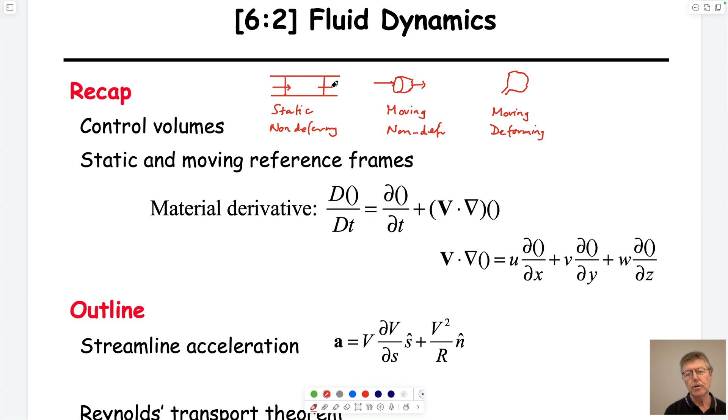So the idea is that they fall into these three categories, and I guess we'll talk about that at the end of today. We'll talk about Reynolds Transport Theorem, which allows us to accommodate those things.

But it's no different when we're talking about conservation of mass than filling up a bucket with water. You know the volume of the bucket, you know the rate at which you're putting water in, you divide the volume of the bucket by the rate, and you get the time it takes to fill it up. That's really what we're talking about, is conservation of mass.

We talked last time about frames of reference, which of course is implicit in this, right? If it's moving, the frame of reference is changing.

So if there's an accelerometer attached to me, it would read how my velocity was changing with time. But if we want to get it for this particular point, we can also get it by merely getting the velocity and the rate of change of the velocity at that point.

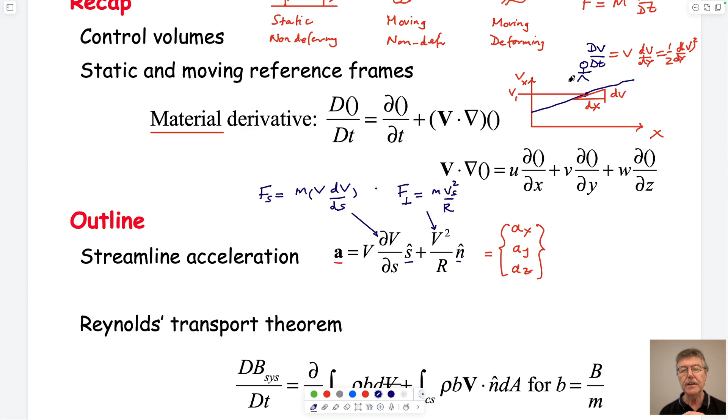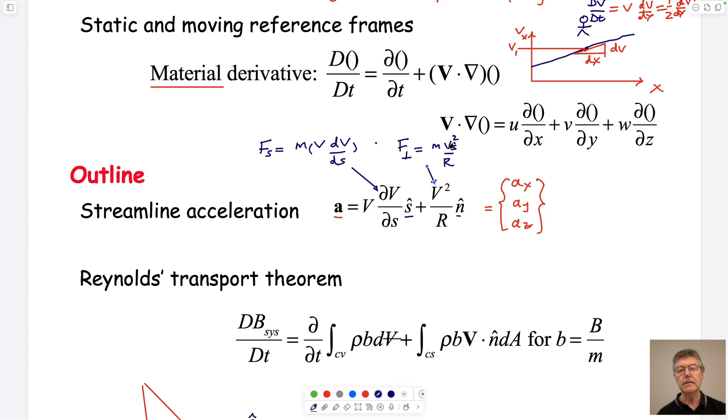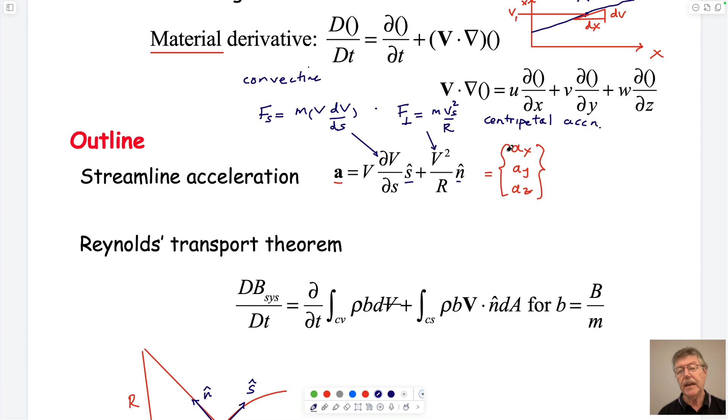We've called this the convective acceleration, which defines that moving something laterally, its acceleration is defined in space. So the convective acceleration is just a substitute for the acceleration of the body. Likewise, the acceleration of the body going around a circle—if you're swinging something around your head—is given by the radius of the string, the mass on the end, and the speed it's going around in that arc, in meters per second squared. So this is the centripetal acceleration, and this is convective. This is just saying we can calculate the accelerations in these directions.

We've used this idea before—we've talked about the acceleration in the x direction and the y direction when we dealt with statics. So what we could do is take this point here and look at defining exactly what this magnitude is. So this is our S vector, and we just need to know what the components of that vector are. For instance, we want to know what this is.

In this particular case, S is going to be equal to 3 components: a component in x, a component in y, and a component in z. So if we make this unit 1, then this by definition is square root 2, just by Pythagoras. We want this vector to be a unit vector, so unit length. So if we divide this through by square root 2, and everything else by square root 2, then we have each of these components.

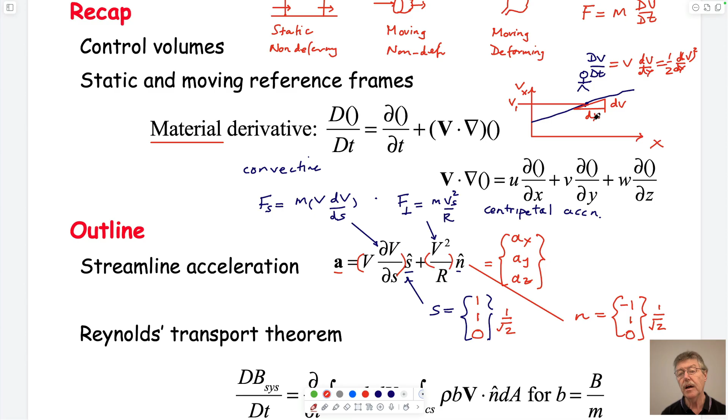It's going to have 3 components. The x component is going to be in the negative direction—again 1 over square root 2—so this is going to be minus 1 because of this. And this is in the positive y direction, so it's going to be plus 1, and 0. Again, this is multiplied by a scalar. This is a vector; the scalar is 10 meters per second squared divided by 4 meters, the length. It's the same as if I'm throwing something around my head, but this now is a streamline, and this is the velocity of the fluid going along it. It's changing velocity as it goes along that streamline. At a particular point, it will have a particular velocity, which is this and this. If we know that information, we can calculate what the accelerations are in the x, y, and z directions, if we want them.

We won't practically want them, but we could get them if we wanted to, and this is the expression that would give us that. So it's useful today for us to understand a little bit about how to calculate vectors, remind ourselves what vectors are. Because when we look at conservation of mass, mass in versus mass out is a scalar quantity—it just has a value, no direction. But when you look at Newton's second law and conservation of momentum, it has an x, y, and z component, so we typically have to worry about the velocities.

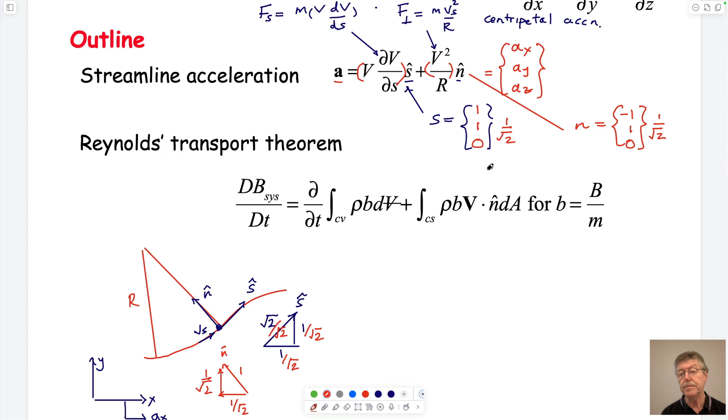You won't have to use this very often, but you do in the homework, and we do need to know what vectors are. So you'd have 3 accelerations, one in the x, y, and z. The one in z would always be 0 because you'd be multiplying this scalar by 0 in each case and adding it to itself.

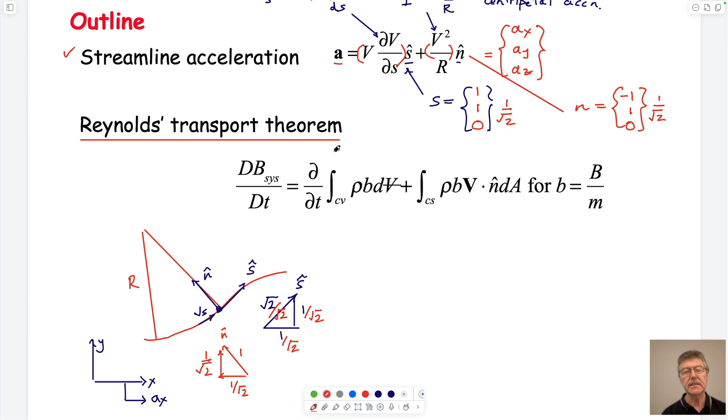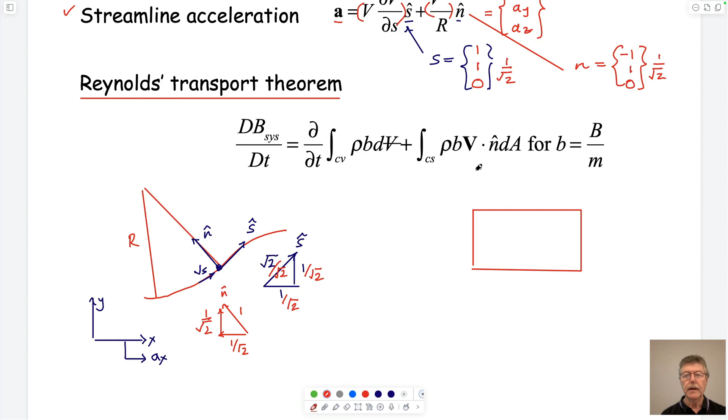All right, so now we want to talk about Reynolds transport theorem. Looks kind of scary, but it's not. I guess while we're talking about vectors, we might talk about dot products—and I bring that up because that term is here.

So what we want is a rational way of saying that if we have a flow V1 in the x direction, we want to calculate how much will go across this surface, which we'll call surface 1. It would have an area A1, and the fluid going into it would have a density, rho 1.

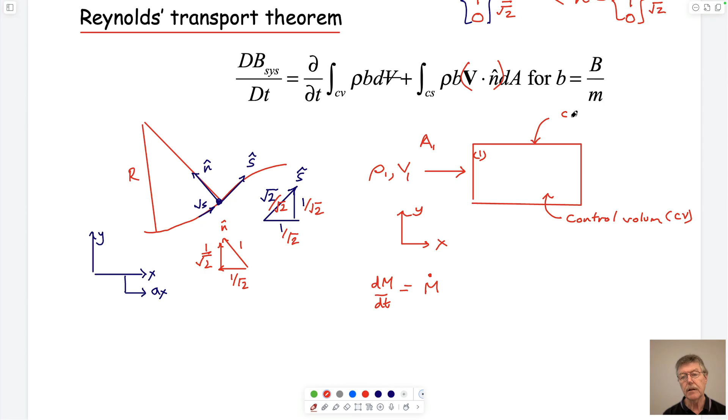If we weren't being precise about it, we'd just do the calculation and come up with the idea that the mass rate in—we'll use this symbol, m dot, where m is mass and dot is rate of change, so this is dm/dt, the change in mass with time—inside this control volume, which we'll call CV, and we'll call this boundary a control surface, CS.

So if you wanted to calculate how much mass is going in, it would be the density times the velocity V1 multiplied by the cross-sectional area A1. That gives us units of velocity times meters squared, which we often call Q, meters cubed per second. If we pre-multiply by density, that's kilograms per meter cubed, and multiplying them together gives kilograms per second, which is m dot. That's the term—I just can't draw squiggly brackets when writing it horizontally, but I'm not dividing it, that's how we calculate it.

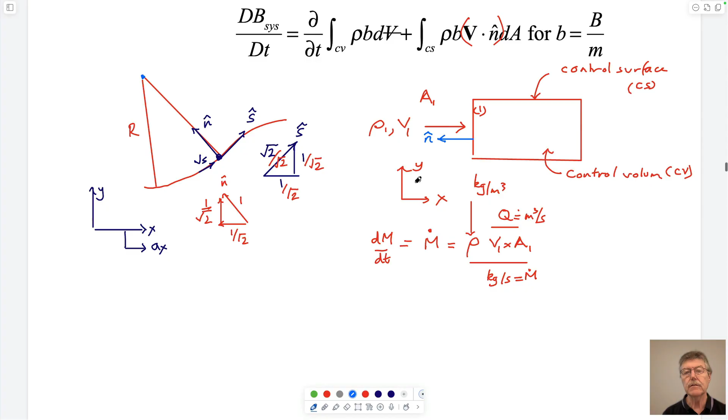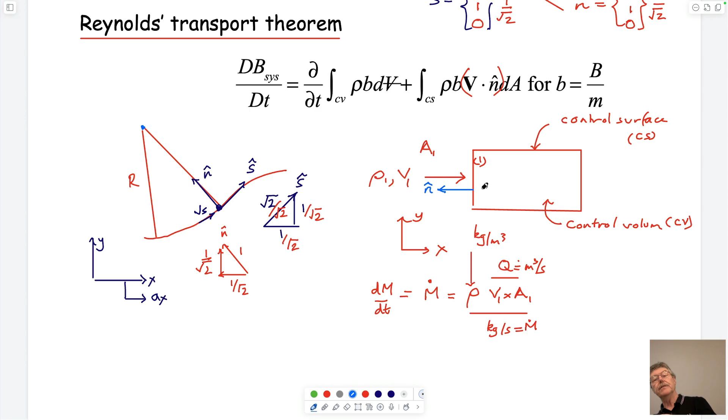So what we might want to do is set up a sign convention using a vector which defines a normal—just like the vectors that defined directions along a streamline and perpendicular to it into the center of curvature, this is just a unit vector outward on the surface of this box. The reason is that when we calculate the amount going into the box, we want the amount crossing this boundary perpendicular to it, and we want to define whether it's going in or out, because it matters if the box is filling up from one side and emptying from the other—there should be a difference in sign convention.

And so we use the so-called dot product. If we look at the dot product, the vector for velocity is equal to—what's it going to be? With x, y, and z, it's going to have 3 components: 1, 0, 0—1 in the x direction, 0 in the y direction, 0 in the z direction, which is into the page—multiplied by v1.

And we also can define this normal, which by definition is oriented as we show here. By definition, it's always unit length, just like our unit length was here. And this unit length here is going to be -1, 0, 0. So it has a component here.

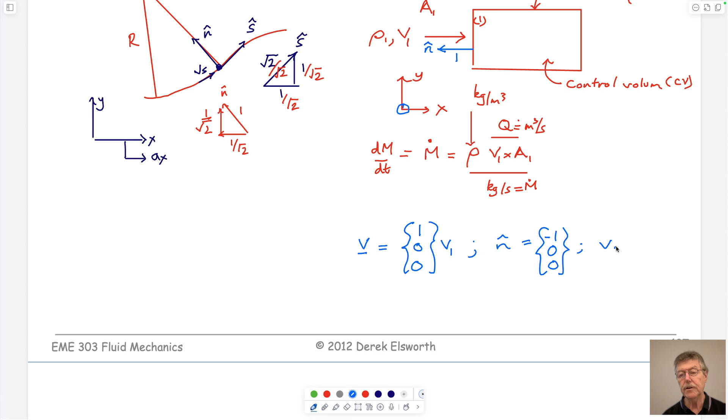So the dot product, if we take it, v dot n is just equal to v1 times -1, plus 0 times 0, plus 0 times 0. And that is equal to minus V1.

And so our sign convention when we look at this is that if flow is going into the system, it's negative. And if it's coming out of the system, let me do the same. Then this would be, so this is N1, and this is V1. So this is N2, and this is V2.

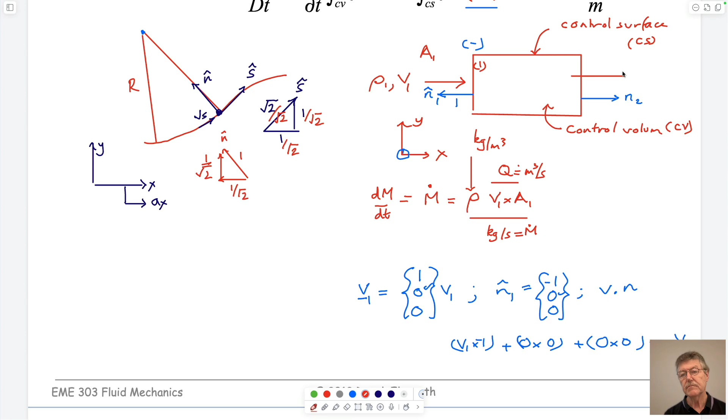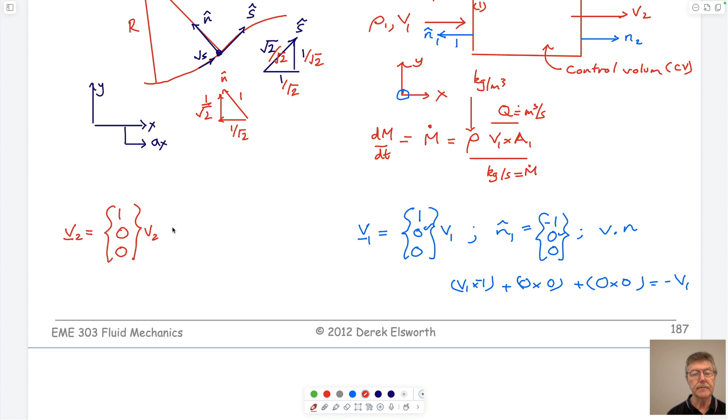Then I'm running out of space, but let's do this over here. This is V2, equal to exactly the same as before: 1 in the x direction, 0 in the y, 0 in the z, multiplied by V2, a scalar. This is a vector. The normal to the boundary now for N2 is slightly different, because it's oriented in this direction. This is going to be plus 1, 0, 0. Before it was minus 1, 0, 0.

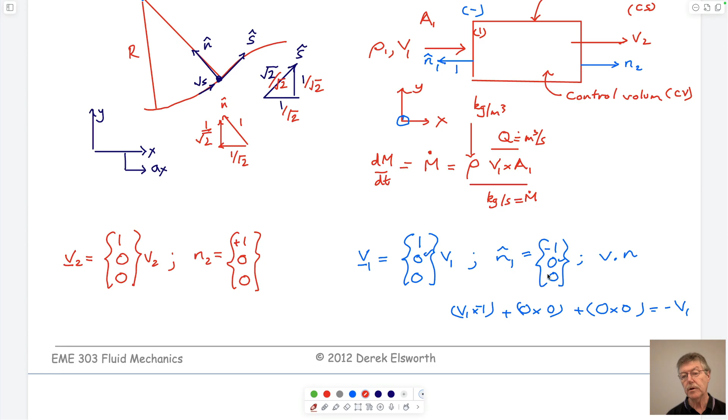And if we take the dot product, V dot N, then it's equal to 1 times 1 times V2, plus 0 times 0, plus 0 times 0. And that is equal to V2.

And so all this dot product is a way for us to put a tag on it, which says that when it's flowing out of a volume, the mass rate is positive, and when it's flowing into a volume, it's negative. It was convenient to talk about this now since we're dealing with vectors. If you don't like dot products, really all it does is two things: it gets the component which is orthogonal to the boundary, which will be the maximum and unique velocity, and it multiplies it, indexing whether it's in or out. It defines this because we always define an outward unit normal to our volume. So if you have a bucket, the outer unit normal is pointing in this direction on this side, this direction on this side, this direction on the bottom, and this direction on the top, as it would be here.

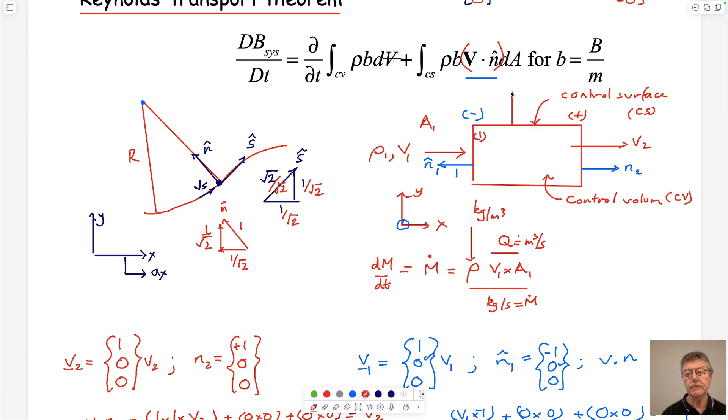And you could do it for this. Actually you could show this if you wanted to: the dot product of V1 dot N3 - if this is N3, you could show that because these are orthogonal to each other, they won't have a component. So the dot product of the velocity V1 in this direction is going to be 0, because if flowing in this direction, you're measuring the component vertically, and it has no component physically in that direction. That's what dot products do. That's all, so I don't want to belabor that point, but that's what we'll deal with.

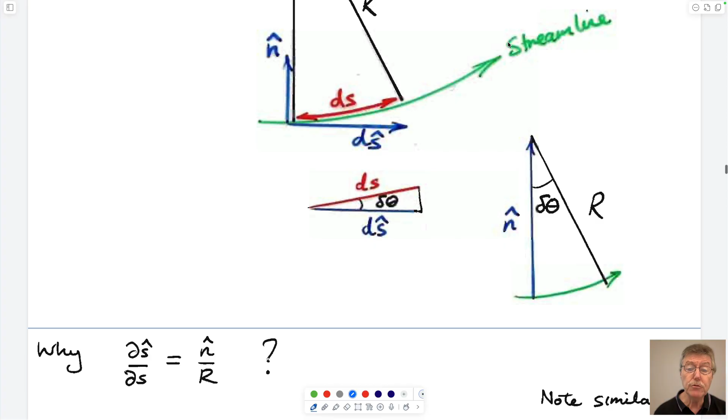So what we're going to do, so we've saved you all this stuff. We've done this, blah, blah, blah, blah, blah. Yeah.

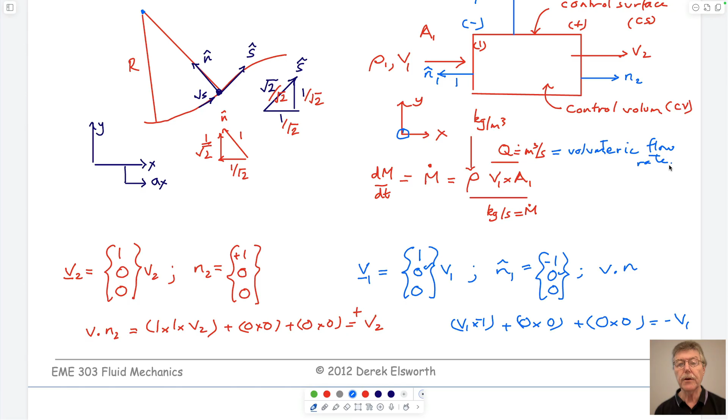Okay, right. So anyway, so we will deal with this thing called Reynolds transport theorem, which starts here. And this is the same expression that we looked at before. We talked about a pipe, a stationary control volume that's not moving. We talked about a jet engine, a moving one that's not deforming, and we talked about a balloon which is deforming. So these are the three different reference frames which we can choose to use. We won't do it today, but we can choose to use it.

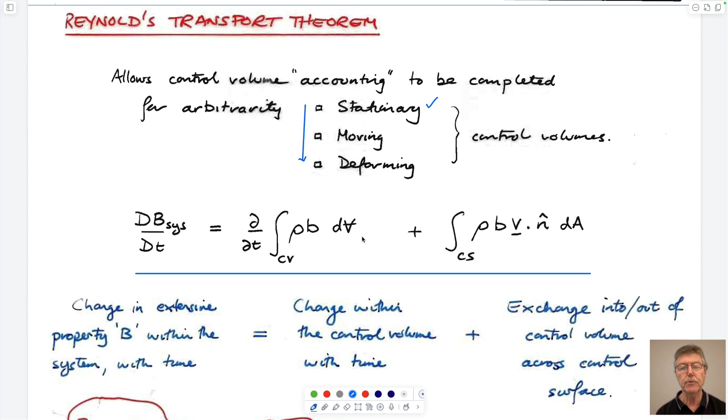And this transport theorem, after Osborne Reynolds, the famous English fluid mechanician, says - if you want to write it out in terms for us, this term here will always be 0. But this says that we can do a balance of things.

We can look at a mass of fluid in our universe, which is the left-hand term, which doesn't change if we look at the mass within this room. We can look at pouring it into a bucket, and look at how quickly it goes in and how quickly it goes out. If it goes in at exactly the same rate as it comes out, it won't accumulate. But any difference between the mass rate in and the mass rate out has to be the rate of accumulation. That's exactly what this expression says here.

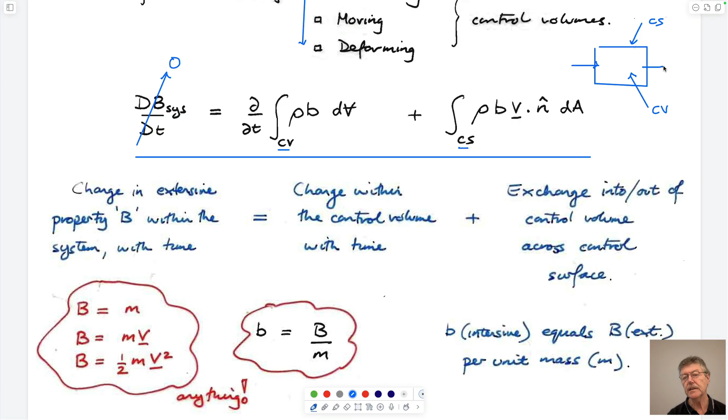So the idea is that, as we said before, we have a control surface, which I'll label CS, and a control volume enclosed by that control surface, CV. You see those terms in this little integration. But this is just saying that if we flow a certain quantity into the system, and a certain quantity out of the system, the difference between these - the exchange into or out of the system - has to be an amount that accumulates. It's not saying anything more than that.

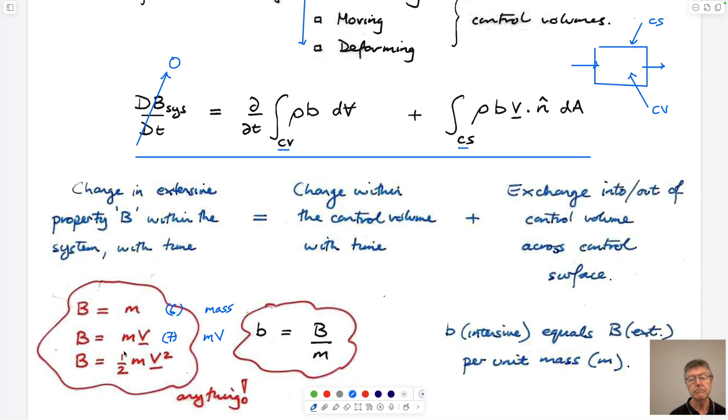In this week and the next two weeks - we're at week number 6 now - we'll look at conservation of mass. Next week, we'll look at conservation of momentum, mass times velocity. And in week 8, we'll look at kinetic energy, so half mv squared. So we'll look at conservation of mass, momentum, and energy, as you'll see in the syllabus, for each of these three weeks: 6, 7, and 8.

In each of these, we'll use this same theorem, which allows us to conserve mass, momentum, or energy in our system. Momentum is just F equals ma, a fancy way of saying that - we've already done that with Bernoulli, it's the same idea. Energy is where we're conserving momentum, but where we allow losses in our system. So far our system is inviscid, so there's no viscosity and no losses. You go from point 1 to point 2, you have exactly the same energy at those two points. You might have switched it between potential energy and kinetic energy, but if you add up all three terms in Bernoulli, they will be the same at those two points. So when we do that for conservation of momentum, we're not losing energy, but if we look at dissipation of energy, which is the essence of fluid mechanics in some things, then we have to deal with that.

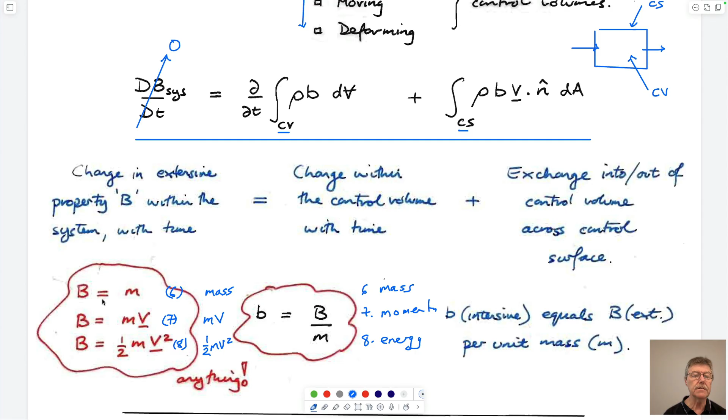So when we deal with conservation of mass, we have a so-called extensive quantity - it's written somewhere else, I'll just write it. We have an extensive parameter, which we'll call B, and an intensive parameter, which is B over mass, lowercase b. It doesn't matter what those terms are, it's all written out for you here. The only one we'll deal with today, which is plenty enough, is mass. And if we look at the intensive property, mass divided by mass is equal to 1. So for us today, B is going to be equal to mass divided by mass, which is equal to 1.

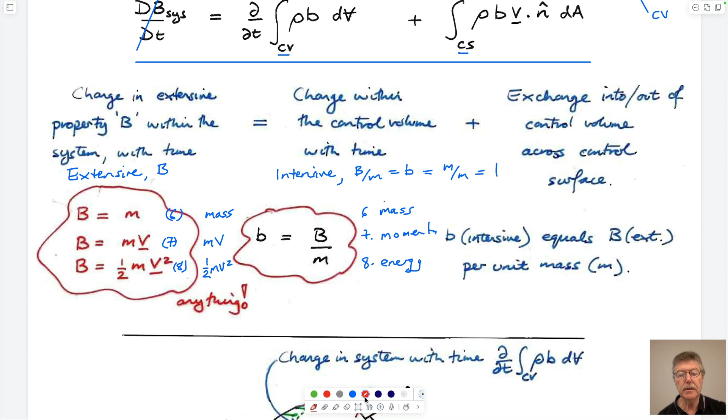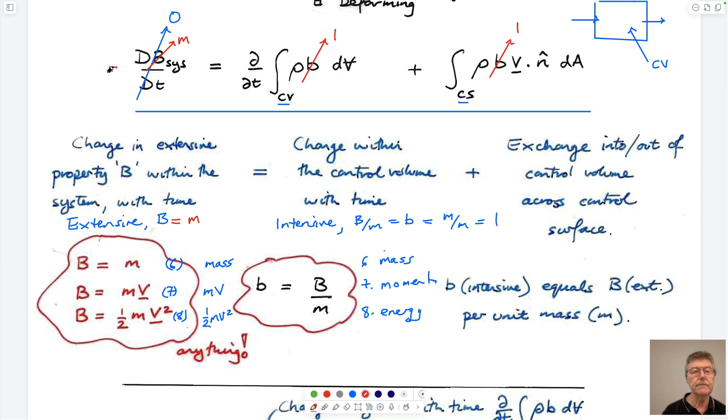So what I want to do is: for us, uppercase B is going to be mass, lowercase b is going to be mass over mass, which is equal to 1. That allows us to put these terms into this equation. And this would be mass - but we're saying we don't care how the mass in the room changes, even if some of it goes into our bucket and some comes out. So this term on the left-hand side, for us, take it as 0.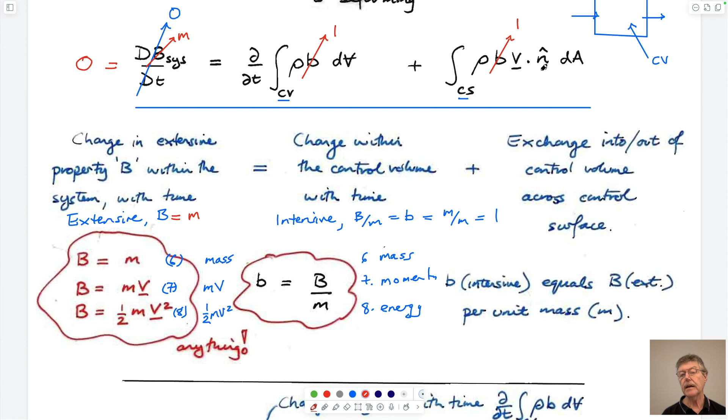So we can write out this term. We know that velocity times the dot product is just the amount going across a boundary, multiplied by a density and by an area. And actually, if we scoot back to what we've done here, that is actually the mass rate of flow going in. A velocity times an area gives us volumetric flow rate - that's probably enough for us, but if density is changing, we just need to pre-multiply by that. So this term here is mass rate of flow.

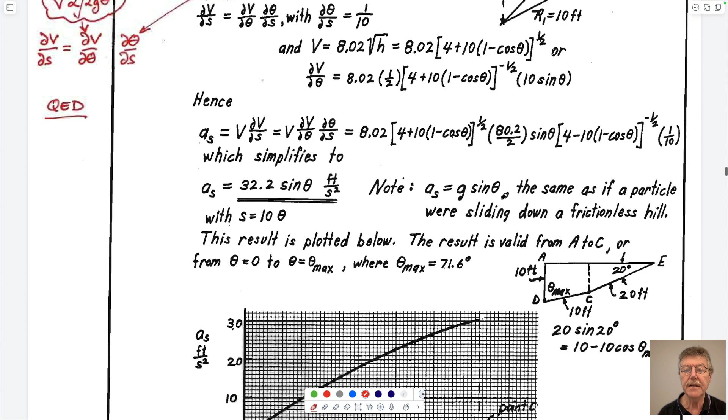So what we could do is write this integral on the right-hand side as the sum of density times v dot n, let's write it as that for now, times area. This is just a velocity across the boundary, indexed whether it's in or out - positive if it's out, negative if it's in. And this term we could write as d(rho v bar)/dt.

If you don't like the look of this expression, we can rearrange it to look like a simpler expression. This says that the mass flow rate in minus the mass flow rate out is the amount of accumulation. And the amount of accumulation is a rate of change of the product of density and volume, not velocity.

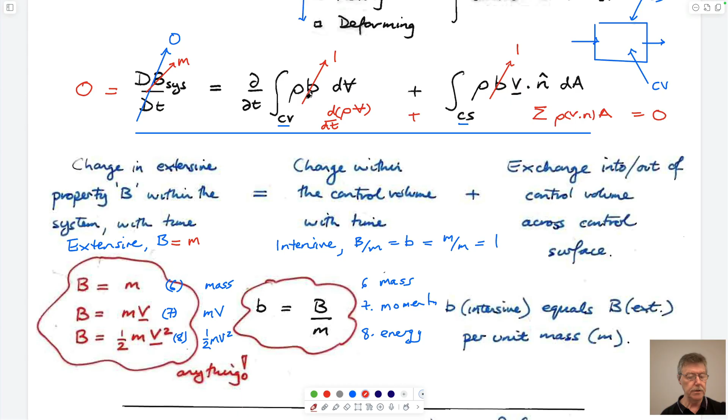You probably don't need to know this Reynolds transport theorem, but it's useful to know where these terms come from. So I'm going to write it out and go back over it. All you would need to know is that conservation of mass, which is what we're doing today...

It turns out to be a rate of change with time of density times volume, plus the sum on all the faces of density times v dot n, times area, equals 0.

What we might want to do is split this term out. We can differentiate by parts, and if we do that, it becomes a volume multiplied by a rate of change of density with time, plus a density times a rate of change of volume with time, plus sum of mass flow rates equals 0.

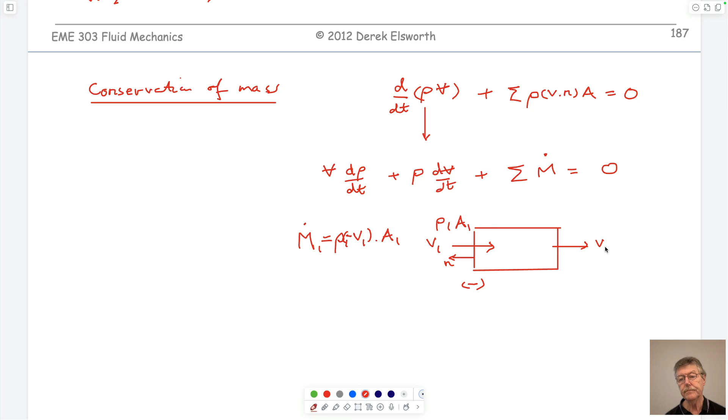Likewise, if velocity v1 is coming out, or v2 is coming out, this is the unit normal, then m2 dot is going to be equal to the density coming out. It's probably the same, but it doesn't have to be. And of course the area would be the area of this face, this whole face into the page. It would be plus V2 times A2, and so this would be positive.

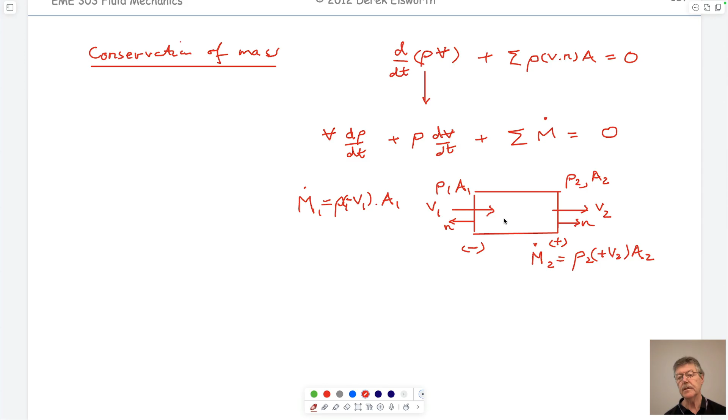If you don't like dot products, then you just need to remember the sign convention. And I suppose the other thing is, we could note that...

This term would be that dV—let me write it the same way as I had it here. So this is volume times rate of change of density with time, plus density times rate of change of volume with time, is equal to plus m1 dot plus m2 dot equals 0. That's what this expression says.

So if the velocity going in and the velocity coming out are the same, then by definition these two will be equal to each other. And these terms, I guess they could be counter to each other, but collectively they'd be 0. There's no accumulation. If the mass rate going in is greater than the mass rate coming out, then there'd be an accumulation.

That accumulation can occur in two ways. Either it goes in at constant density and the volume of our box expands, which is this term here—the volume of the box expanding with time while it goes in at constant density. That would be like flowing water into a bucket where the water level rises and the volume of the control volume, if you attach it to the top surface, changes.

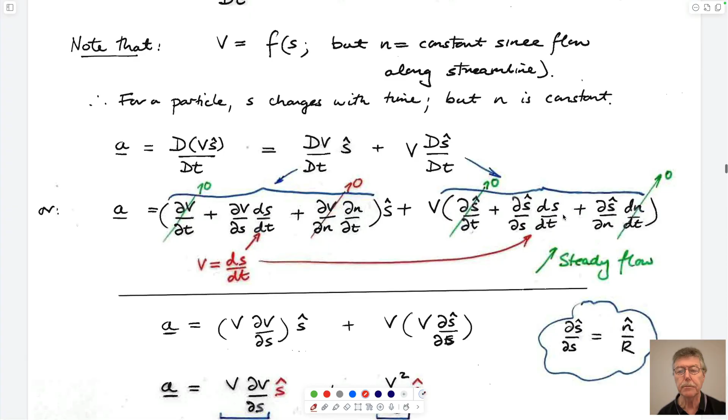I do want to go through two examples, so it's not just theory we've talked about. This is the same idea as before, these are the expressions we're dealing with. Let's just talk about filling a volume up with a fluid going in. We've talked about the equation we end up with, which is this.

So what we could do is look at two examples. One is the exact example we talked about: pumping up a tire. We have a tire, it's closed off, and we're going to pump air into it at velocity v1 and rho 0 as it goes in. The volume of the control volume, VCV, is equal to this. So we can write our expression in terms of rates: mass rate in, the sum of the mass rates in, is equal to the rate of change of volume of the control volume with time times the density, plus the volume of the control volume multiplied by the rate of change of density.

So what do we have in here? The control volume is not changing size, so by definition dV dt is 0, hence this term here. We know that this term here is going to be equal to area 1 times density 0 times velocity 1. We know that we're going into it, and so this should be negative, I guess, right? So area 1, rho 0, v1 is this - rho 0, v1, area 1, it's negative. There is no fluid coming out of here, so v2 equals 0, so there's no term.

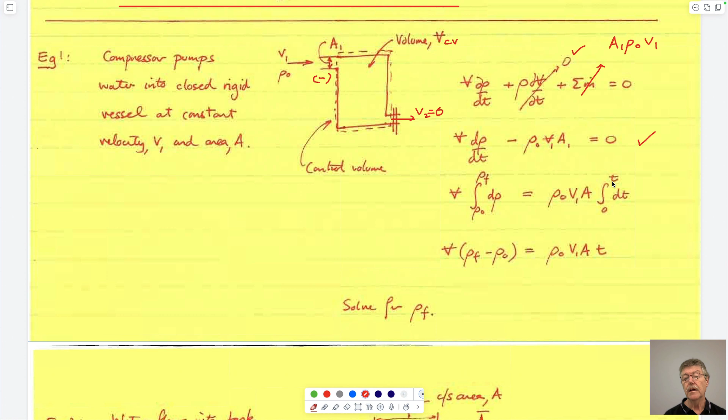This is our conservation expression, that's all we need. So what we might want to do is figure out what the density is when we've finished pumping into the system. We can take this, multiply both sides by dt, and integrate both sides from the initial density to the final density, from the initial time to the final time. The integral of this is just t.

If we evaluate it between the limits of 0 and t, it's t minus 0, so that's this term here. If we integrate this, it's just rho evaluated between these limits. The final density is this one, the initial density is this one. Multiplied by volume, we have this. So we have everything we need to know.

We know the density it goes in with in the beginning, we know the volume of the tire, we know the initial density, we know the velocity at which it's going in, and we know the area over which it's going. So this term here, with what we'd call Q, is just our volumetric flow rate, meters cubed per second. And we can solve for the final density. That's it.

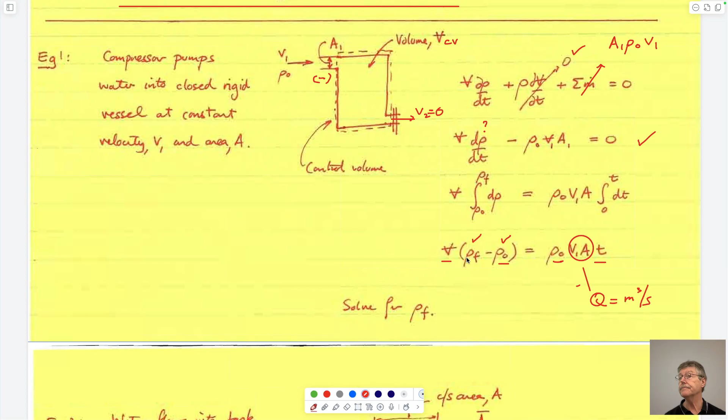So the other problem to solve would be by doing this, and we'll do this more next time. Instead of filling a tire, we're going to fill a bucket, filling it from the bottom. We're going to attach our control volume, even though I'm doing it in red. Our control volume is going to be this, and we're going to allow the control volume to increase in volume, because we're going to attach it to the surface of the water.

We're putting water into the system, this is going to be the same as before. This is going to be rho 0 V1 times A1, which is kilograms per second. There's no fluid escaping our control volume because we're anchoring the top of the control volume to the free surface, which is rising. So we can look at these two components.

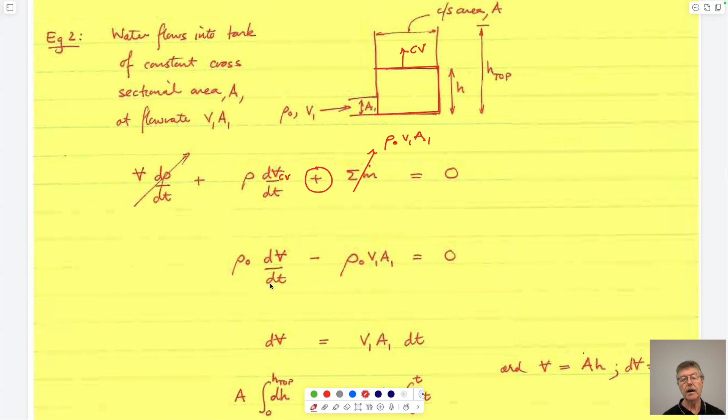The density of the water going into it isn't changing very much because it's still atmospheric pressure, so we know the change in density as we pump it in isn't changing. But the volume of our control volume is changing, and so we can write the expression as this. Since it's going in, this term here has to be negative. The other term is that the volume's changing with time, and we can write that out. It's equal to 0, so we can equate each of these two to each other just by this.

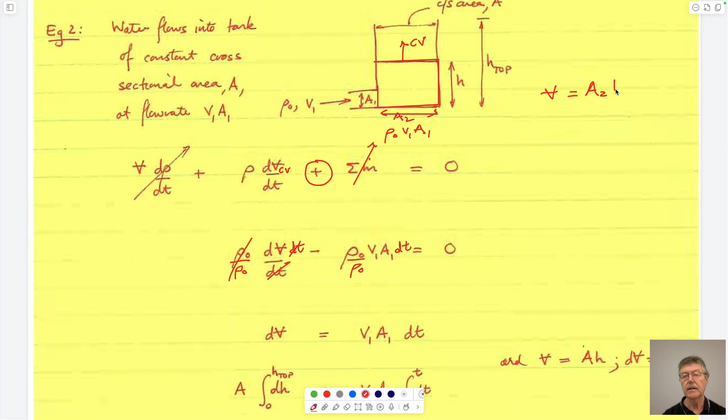We can divide both sides by rho 0, multiply both sides by dt, and so we have this. Then if we write out the volume as equal to this area here, call it A2, the volume is equal to A2, the bottom plan area of the bucket, times the height. The height is growing with time.

If we write this, it's just the volume, we can write it as a function of the height, and we can do the integrations. If the initial height is 0, then the integration of this just becomes the height of the top. We know the rate at which we're pouring it in, we know the pipe diameter pouring it in, we know the cross-sectional area of the bucket, and we want to know how high the top is after 10 seconds. This is the only parameter we can solve for. That's it, solve.

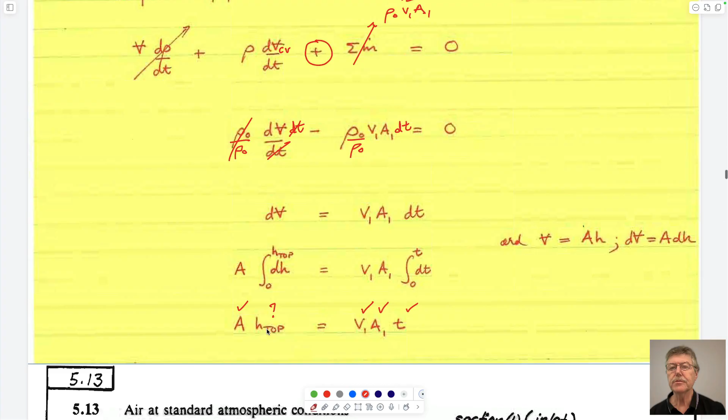Not so simple, but there are some simple rules to remember, and I guess we have it on the page. You just have to remember the sign convention that we talked about: if you're flowing stuff into the system, it's negative; if you're flowing stuff out of the system, it's positive. If you're net increasing density with time or volume with time, those are both positive. If you use that sign convention, everything should be fantastic. Okay, that's it.